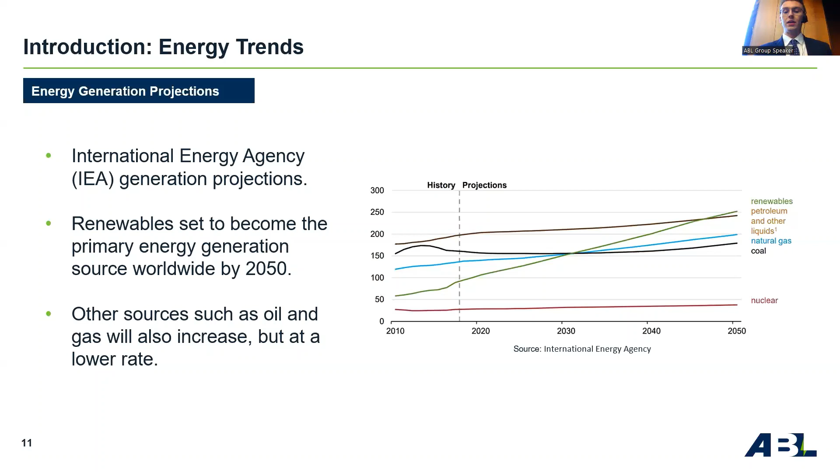Looking to the right-hand side of the dashed line, these IEA-based projections depict that renewables will become the primary energy generation source worldwide by 2050. I should note that the near linear growth rate emphasizes that this is a fairly simplified prediction. Of course, other sources will increase their output to keep up with the rising demand during this period, but at a lower rate. If this projection of renewable energy taking over as the primary generation method is to become reality, what is it that we must keep up with in terms of our energy consumption?

A harsh dichotomy to these renewable energy projections is presented in the graph seen on the left. From the Energy Information Administration, we can see that global energy demand is on an exponential rise, with 2020 levels in Asia set to double by 2050. Of course, this is not news to any of us in the room today, but for renewable energy sources to take over in the race to keep up with our global demand, the following questions are raised.

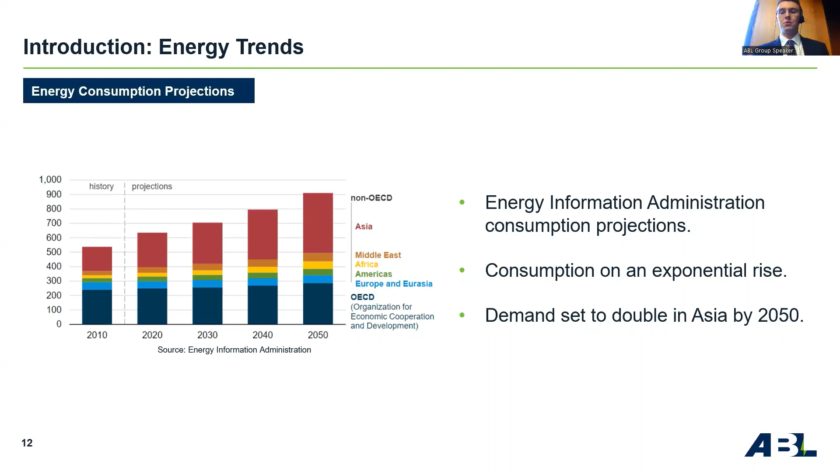What can be done between now and the prophetic 2050 marker that so many governments and international bodies have set as our next environmental milestone? What advancements and improvements in technology must be made in this time? And finally, is it even going to be possible?

So how can we best illustrate the contest we're currently facing between our energy production versus our demand? Well, I thought there's no better way to describe potentially the biggest problem we're facing right now than through a cartoon. So the cartoon on the right depicts a race, which itself has infinite laps, in which we have our energy demand forever in first place, with its foot firmly on the accelerator.

The lagging racers, renewables, oil and gas, nuclear, to name a few, are constantly fighting to keep up with the demand, overtaking, undertaking, and sometimes cutting corners to do so. How then do we create the image we see here, with renewables overtaking its competitors and tailing our demand? The components of renewable energy generation must be modified and improved, much like our renewable cars components.

The graph on the left from the Energy Information Administration shows the average annual growth rates of renewables supply from 1990 to 2020. We can see many components: solar PV, or the engine of our car, wind, the chassis, and biogases, the drag reduction system, are currently the best performing parts of the renewables car.

But what about the tires, gearbox, steering wheel, airbox, and so on? Small 1% improvements to each of these components may not make a notable difference in isolation, but together they compound into improving the overall performance and endurance of our car. So each must be developed to its full potential. Clearly, there's room for improvement to allow the top speed to be pushed further and further, particularly in hydro, geothermal, and thermal energy storage. So, how can we act against the clock to improve these?

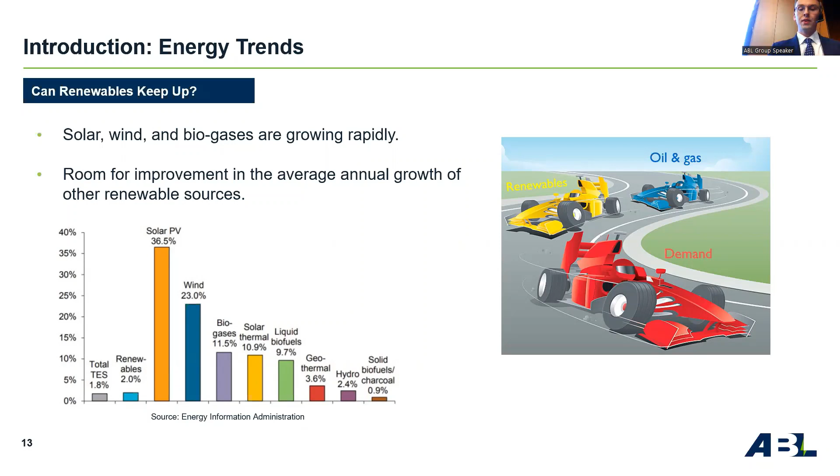Before getting into current renewable technologies and the importance of their advancement, I just want to give you an historical overview of some of the legislation that is driving this transition at a political level and what it means for the EU, the UK, and ourselves at ABL as well.

So a bit of a historical background. In 1992, countries joined an international treaty, the United Nations Framework Convention on Climate Change, as a framework for international cooperation to combat climate change by limiting average global temperature increases and prevent dangerous human interference with the climate system. The Conference of Parties, or COP, was established as the supreme decision-making body of the UNFCCC.

By 1995, countries launched negotiations to strengthen the global response to climate change and, two years later, adopted the Kyoto Protocol, which legally bound developed countries to emission reduction targets.

Today, the UNFCCC has near universal membership, and the Kyoto Protocol has since been replaced by the more commonly known Paris Agreement. The Paris Agreement was adopted by 196 parties back in 2015 and requires economic and social transformation.

It also works on a 5-year cycle of increasingly ambitious nationally determined contributions, or NDCs, which are each country's climate action plans. On the screen are some examples of NDCs set by the UK and the EU.

In terms of how these goals have translated for us at ABL, we are currently working towards a target of 50% of group revenues to be generated from renewables by 2025.

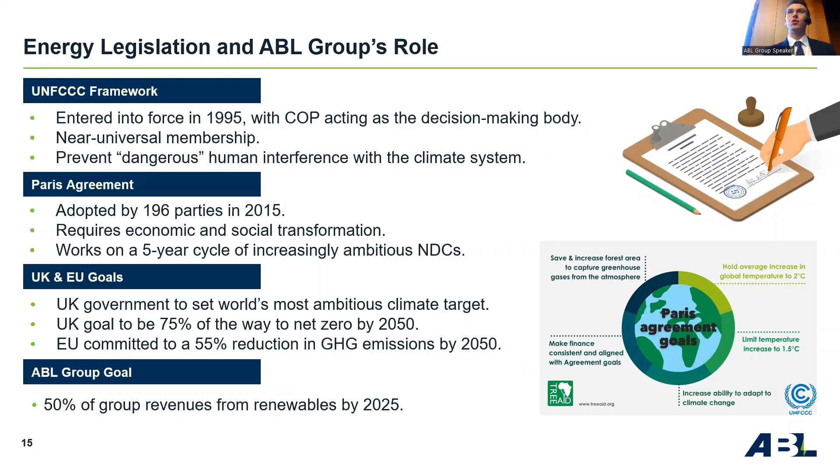Bringing us into the present, most recently at COP27, which lasted almost 2 weeks and ended on November 18th, produced 5 main outcomes. The first is that the need for funding for loss and damage was finally admitted to the agenda for the first time.

This was after developed countries had long sought to avoid direct talks on financing loss and damage. This resulted in about 340 million euros of new pledges.

The second is that the influence of oil and gas interests at the climate talks is growing, with a 26% increase in registration from lobbyists from the oil and gas industries at COP27 compared to COP26.

Thirdly, concerns that current net zero targets are not rigorous enough, and in the words of the UN chief, have loopholes wide enough to drive a diesel truck through, have meant that net zero targets have been made stricter.

This is to avoid greenwashing, the act of making unsubstantiated claims about the positive environmental impact of a product.

Before now, food and farming has been a topic which has remained absent in UN talks, even though global food chains from production to consumption contribute to around a third of greenhouse gas emissions.

This year, flooding in Pakistan saw rice harvests plummet by about 31%, while drought caused yield losses in the US, Europe, China, and India. This prompted the Food and Agriculture for Sustainable Transformation, or FAST initiative, to be established.

And finally, the technology mechanism was established in 2010 by the COP to facilitate technology development and transfer to developing countries. This year, a work program was launched for this in order to accelerate the deployment of transformative climate technologies.

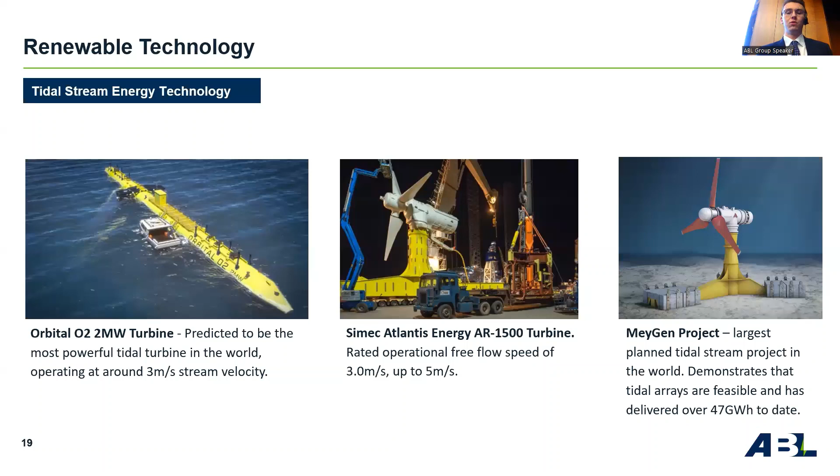There are more than a few factors to consider in the bid to sustainably increase current renewable energy generation, to modify our renewable car as much as possible. These include progressing renewable energy policy mandates, increasing grid stability, capacity, and architecture, ensuring consistent increases in installed capacity to drive down costs, and, for the purpose of this presentation, most importantly, technological advancements through research and development.

In this part of my presentation, I'm going to exemplify the importance of research and development in unlocking more of the Earth's potential renewable energy, and will use my own university dissertation as a form of a case study.

There is massive potential for communities to power their lives using the ocean, which could generate well above 130,000 terawatt hours of electricity per year, according to the International Renewable Energy Agency. The UK government estimates that wave and tidal stream energy combined has the potential to deliver around 20% of the UK's current electricity needs, which is around 30 to 50 gigawatts.

Unlike solar and wind, tidal is a predictable and reliable source of renewable energy, as the motion is constantly driven by gravity. However, due to the limitations I just mentioned, tidal technology currently lies far behind its renewable competitors in terms of development due to its highly site-specific nature. Lower velocity sea regions, that is between 1 to 2 meters per second, are far more prevalent throughout the globe. Therefore, the design of tidal stream turbines to accommodate these sites could improve the overall global feasibility of tidal technology.

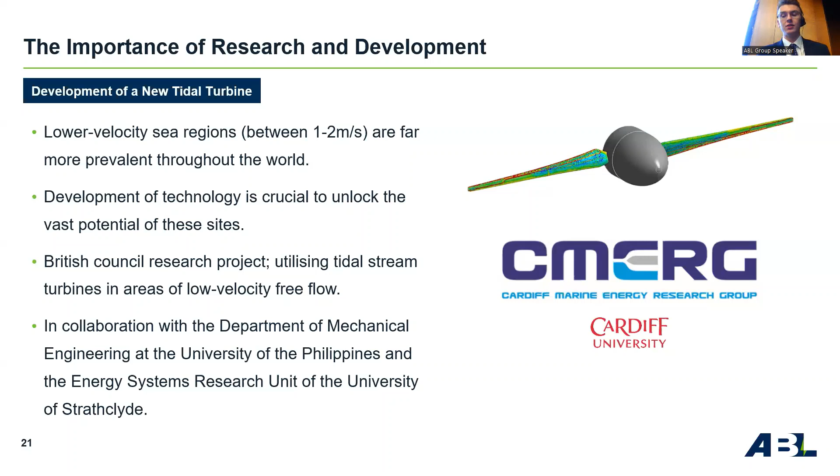As part of Cardiff Marine Energy Research Group, the work I carried out during my penultimate year at university was part of a British Council research project. This project looked at utilising small-scale tidal stream turbines in areas of low-velocity free flow.

The work itself presented a structural analysis using a form of finite element analysis software on a new twin-blade 4-meter diameter tidal stream turbine to operate in low-energy bodies of water in the Philippines. This design will likely be implemented within a cluster of floating turbines.

To begin, results from a previous fluid dynamics software analysis were taken to accurately simulate the forces that the turbine would experience in operation. With these forces known, I then analysed if the turbine could operate successfully or if it would fail miserably under the tide's load.

For the purpose of this study, the parameter of main focus was the safety factor. Defined as the ratio between the ultimate material stress and the maximum stress actually reached in operation, the safety factor gives the likelihood of failure of the turbine over a given design life.

This means when the safety factor is less than 1, failure is certain to occur before the design life is met. According to the engineering toolbox, rotating turbine components should have an overall safety factor within the range of 2 to 3, meaning for safe operation within a given design life, the maximum recorded stress within the turbine should be 2 to 3 times smaller than the maximum allowable material stress.

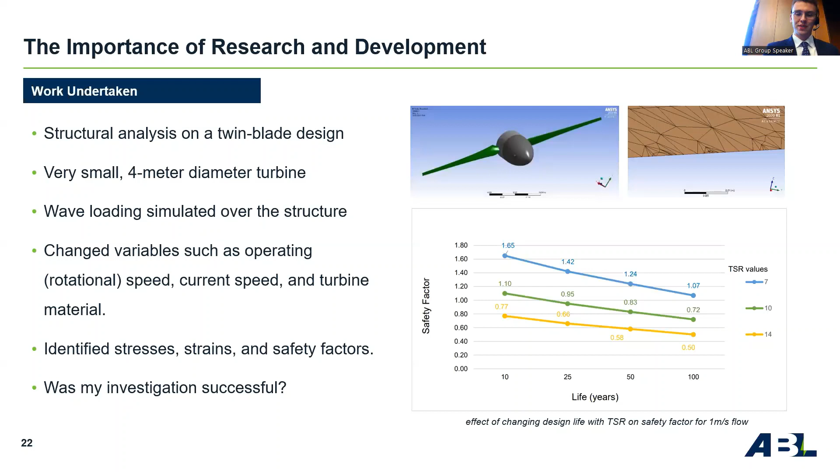As with most endeavors to advance our current technology, this one was not as fruitful as I'd hoped. I concluded that safe operation was not possible for the design with the chosen materials, as my best case safety factor was still some way off the lower limit for safe design. However, promise was shown towards safe operation over a 25-year design life, with further research and development needed.

Potential was shown in the movement towards small-scale tidal turbine technology and its integration into the abundant low-energy marine areas around the world. As for future recommendations, I touched upon the importance of further research and development in this study, given the potential benefits of its success.

My future work suggestions included further breakdown of the blade structure to increase result accuracy, further investigation into the behaviors of different materials and metals being used for the design, with the possibility of incorporating internal support structures, development of a full environmental impact assessment, or EIA, prior to the front-end engineering design, or FEED package, and finally using both CFD and FEA software in a two-way fluid structure interaction to accurately hone results.

I hope this element of my presentation wasn't too technical today, and I also hope it's given you some insight into how close the next technological step can be for renewable energy systems. I believe the importance of funding and training to support research and development in accelerating the renewables race is just as important as the speed with which we implement new installations.

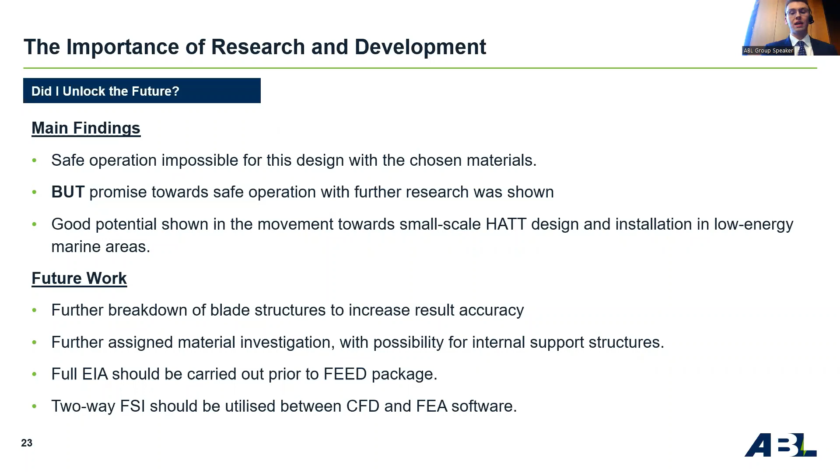On the topic of tidal research, I'm just going to touch upon some examples of what's currently going on within ABL Group.

ABL Group's marine energy engineering consultants at INNOSEA in France are already working on implementing small-scale tidal turbines with developers Nova Innovation. Since 2016, Nova Innovation have been installing a turbine array in Shetland.

This array now consists of 6 turbines, each of 9 meters diameter, and is currently powering around 600 homes. It's the world's first fully functioning tidal array and boasts the most turbines.

The developers worked with Tesla also to add energy storage to their tidal technology, creating the world's first grid-connected tidal power station with the ability to deliver baseload power and energy on demand to meet consumer needs.

Nova also have an array being constructed in the Bay of Fundy in Canada, which is home to the largest tidal range in the world. The technology here, much like that...

in my research project, is focused on small, extremely reliable turbines to bring down the cost and frequency of maintenance. Nova claims that its current array can operate for 18 months without intervention.

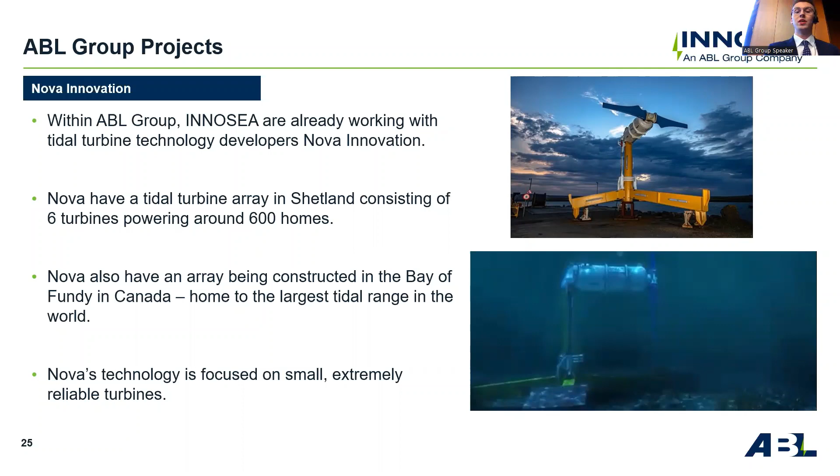And if you weren't already convinced on tidal energy, Nova Innovation apparently has plans to produce Scotch whisky distilled by tidal power in the Sound of Islay off the coast of Scotland.

INNOSEA have also contributed towards a project on the EU's Research and Innovation funding programme, Horizon 2020, titled Effective Lifetime Extension in the Marine Environment for Tidal Energy, or ELEMENT programme.

The goal of this project, led by Nova Innovation, is to reduce tidal energy costs and increase installation lifetime by optimizing the control system of a tidal turbine.

that will slash the lifetime cost of energy by 17%, making the EU tidal energy sector commercially viable.

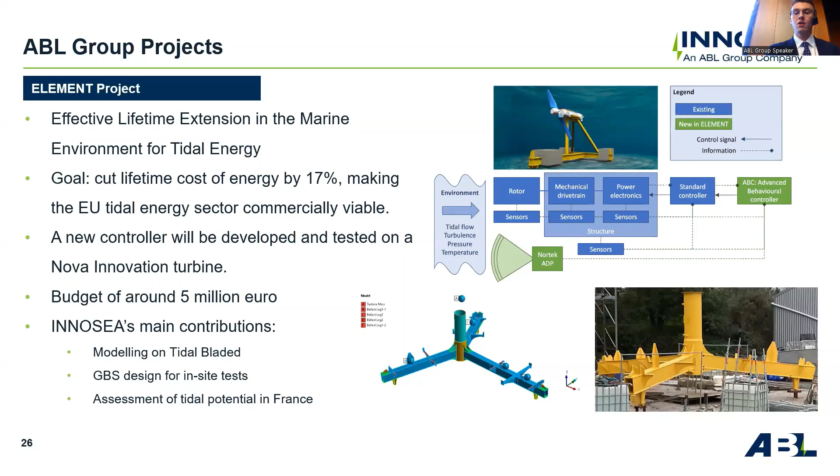The overall budget of this project is in the region of €5 million, and INNOSEA's main contributions included computational modeling of the turbine, work on the gravity-based structure, pictured in the bottom right, from initial design to construction and testing, and finally, assessment of tidal potential in France, which involved evaluation of socio-economic, regulatory, ecological, and human impacts.

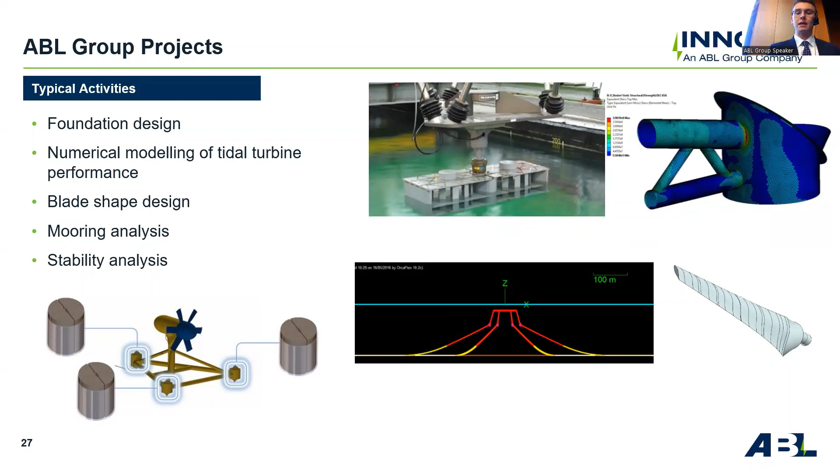Other work conducted at INNOSEA includes turbine foundation design, numerical modeling of tidal turbine performance, blade shape design, mooring analysis, and installation stability analysis. If you'd like any further information on these projects, please email myself and I can refer you to our experts in INNOSEA.

Knowing where I'd be delivering this presentation today, I knew that in trying to draw a complete picture of my chosen topic, I could not go without talking about the risk associated with some of the engineering I've touched upon. Of course, as with any engineering operation, there are risks involved in renewable energy installations. I'm going to finish now by presenting some risks and hazards in offshore energy in particular.

Understanding the risks and hazards associated with the engineering and construction of new technologies in the renewable realm are still in their infancy, particularly where natural catastrophes are concerned. With the introduction of new tools and technologies comes new challenges in construction.

Offshore renewable projects involving tidal, wind, and solar farms pose significant challenges to insurers responsible for underwriting these risks. Larger, more complex projects mean bigger potential losses, while the threat of natural disaster looms large.

As for tidal, risks arise from vessel collision, which applies to most offshore installations, blade damage or corrosion as they are fully submerged in the ocean, and unexpected impacts from marine wildlife.

It should be noted that risks can also arise from the birth of new technologies. As with all new designs, when they are first implemented in the field, reduced operational capacity can often bring claims resulting from loss of income for operators. This can be caused by reduction in operational capacity pending completion of remedial works, or for permanent loss of income if the defect cannot be rectified.

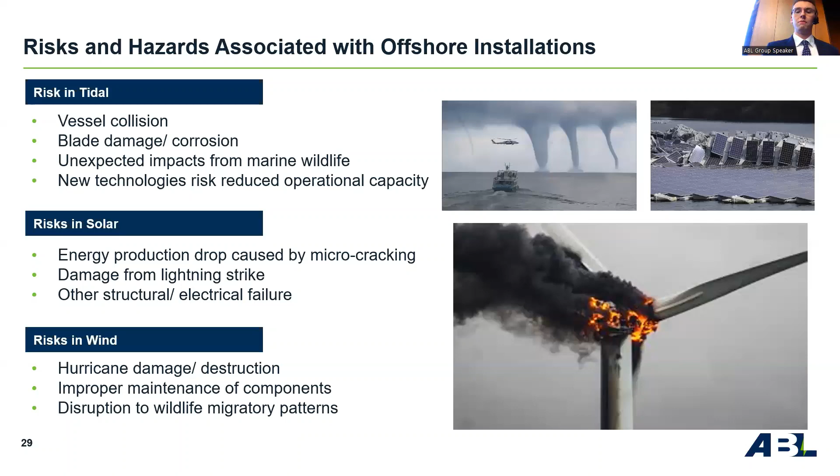Of course, the immediate marine environment and inhabitants must be considered in construction also, which is often carried out in an EIA prior to FEED work.

Finally, general hazards when working on offshore installations include falls from height, mechanical hazards, blade failure, ice throws, ship collision or men overboard, electrical hazards, and, as mentioned before, fire or explosion of turbines or vessels.

Though the desire to quickly accelerate renewable energy production is clear, the obligation to first evaluate associated risks should not be forgotten.

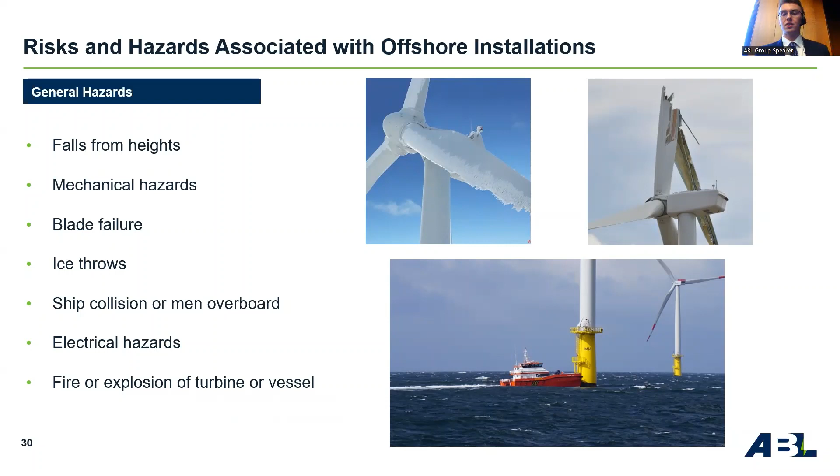So, to finish, let's recap on today's learning objectives. Firstly, you will be able to identify current energy trends, comparing projections of energy production to energy demand. Secondly, you will develop an understanding of clean energy legislation and what it means for the industry. Thirdly, you will be able to explain the importance of research and development in unlocking potential offshore renewable energy sources. Finally, you will be able to summarize the risks and hazards associated with offshore renewable energy installations.

Hopefully these outcomes have been met for those of you in the room today and online, and I hope you found this presentation insightful. Are there any questions? You're also welcome to email them across to Ellie later on.

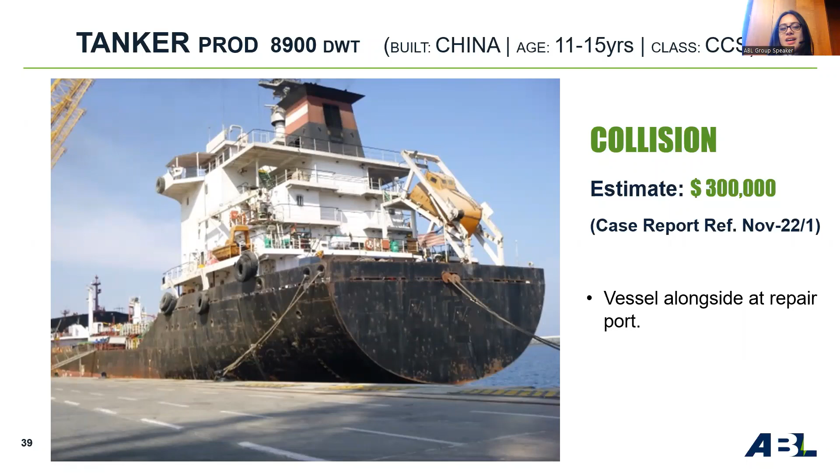First up, we have this 15-year-old products tanker that was involved in a glancing blow-type collision while departing a Middle Eastern port at about 3 o'clock in the morning. The other vessel was inbound on the fairway, and both pilots had communicated and agreed to pass each other in a standard port-to-port configuration. For some reason, however, the other vessel suddenly deviated to port, and despite efforts to get out of the way, our vessel here got hit on her port side aft. Nothing dramatic in terms of damage, fortunately.

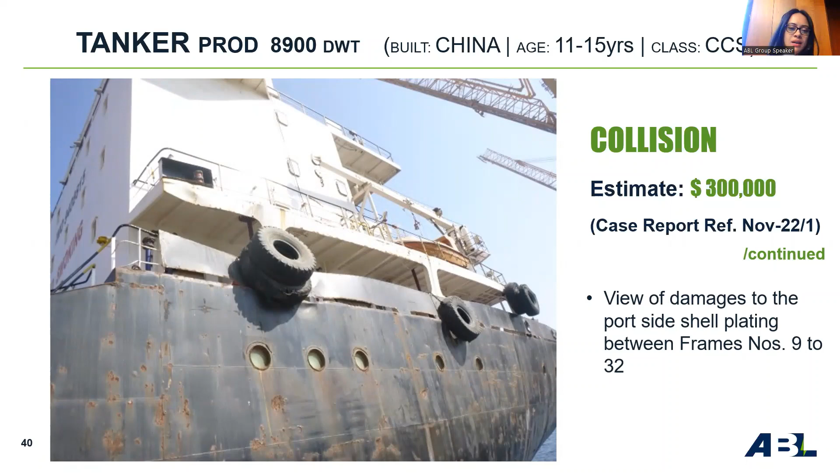We haven't got the full story yet from the other vessel, but if you were looking for a root cause in incidents like this, you would be looking at possible things like navigation equipment failure, steering system failure, loss of power, or navigational error.

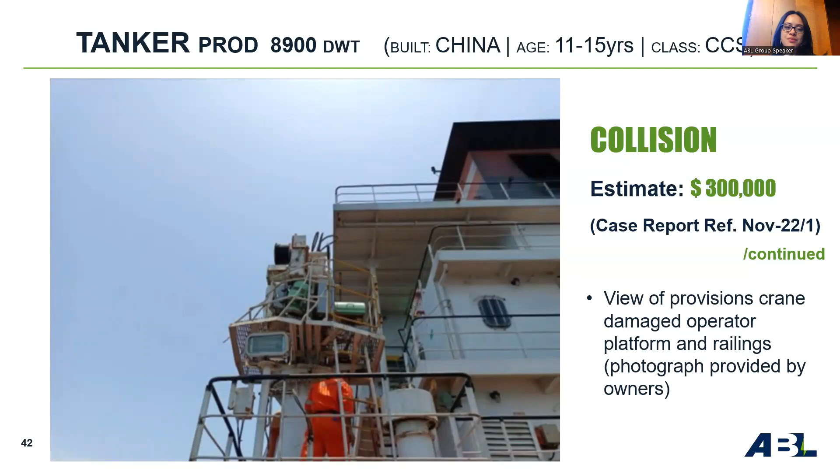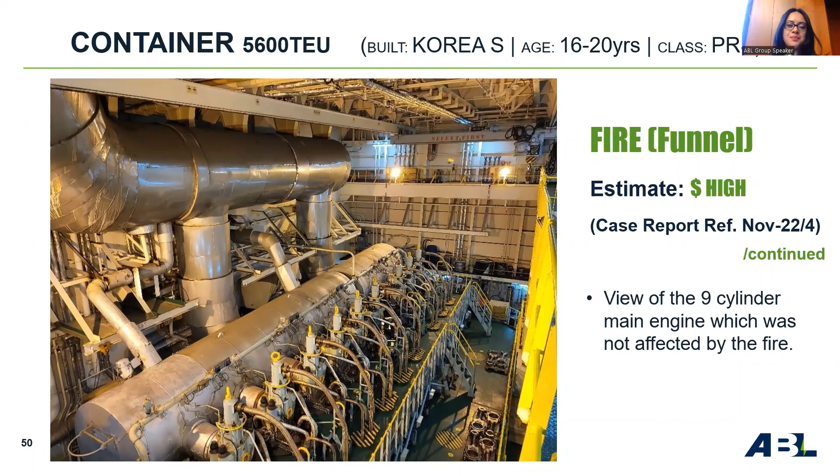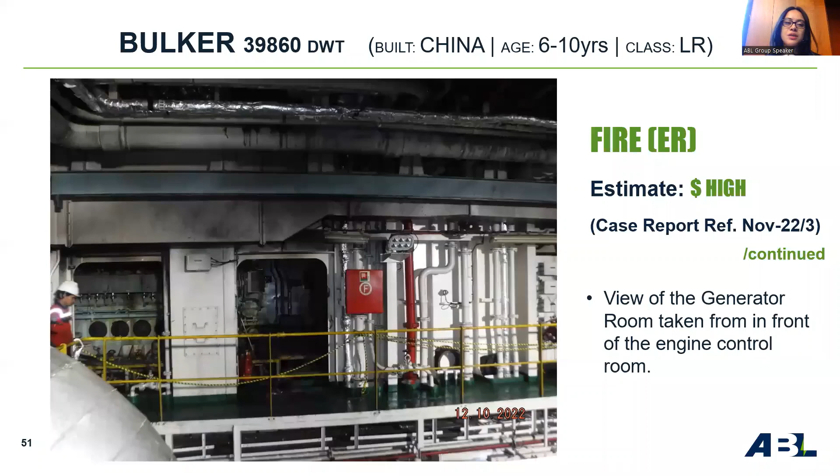The bulk of the direct fire damage was in the generator room, seen here, from a position just outside of the control room. Going in there, we find all 3 generators badly affected. Examining the scene, the seat of the fire appears to be in way of the number 2 generator engine.

The exact cause is under investigation still, but it could well yet be another, sadly familiar, example of failure of a high-pressure fuel line spraying fuel onto hot engine parts, such as the turbocharger.

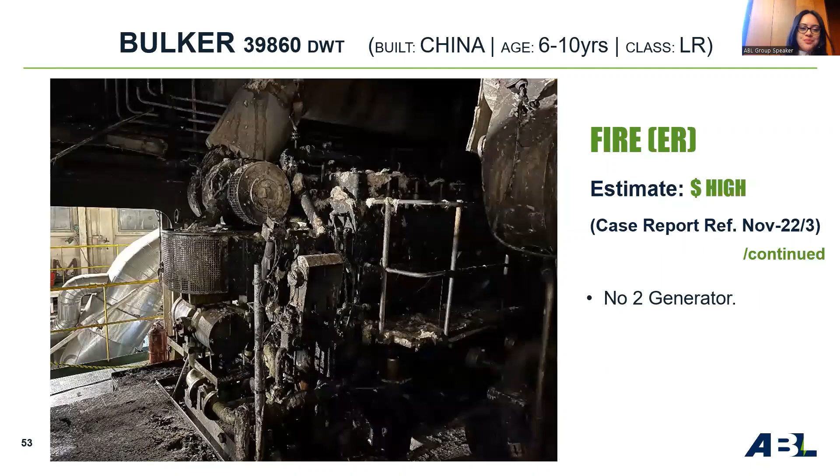Here's the deck head above the number 2 generator. Steel renewals will be required as the deck above has deformed with the heat. And as always, replacing wiring will be a significant portion of the total repair cost.

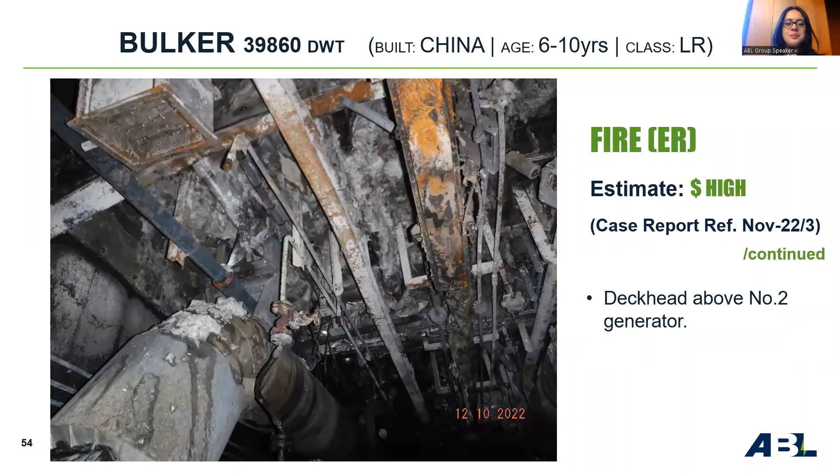And now, for the fun bit, the relatively new type of story. This 17-year-old container ship suffered the order of $2.5 million worth of damage as a result of a fire that broke out in her scrubber funnel at 2 a.m. in the morning, 2 hours after she left a European port.

Scrubbers, or exhaust gas cleaning systems as you know, are necessary retrofits to older vessels to remove particulate matter and harmful components, such as sulfur oxides and nitrogen oxides, from the engine exhaust gases. We saw lots of fire incidents during the installation of these scrubber systems, and here's a case of fire occurring during operation.

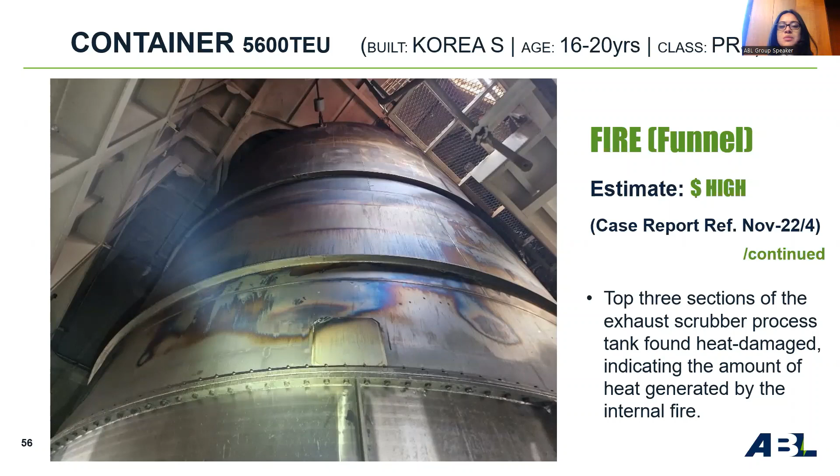In this case, the fire was contained within the exhaust gas scrubber process tank, as seen here, where the upper 3 sections external shell indicate the amount of heat that was generated by the internal fire. The radiated heat from the tank, though, did also affect wiring, light fittings, and some structure and paintwork in the vicinity.

It would appear that the fire originated in the packed bed filters, which are now broken and deformed. Mist eliminator filters further up the stack have also been damaged by the heat.

The cause is still under investigation, and we'll be keeping an eye out for these sorts of casualties and any near misses. Indeed, if you're lucky, Paul Hill may mention problems with these relatively new systems in his New Year review in January's briefing.

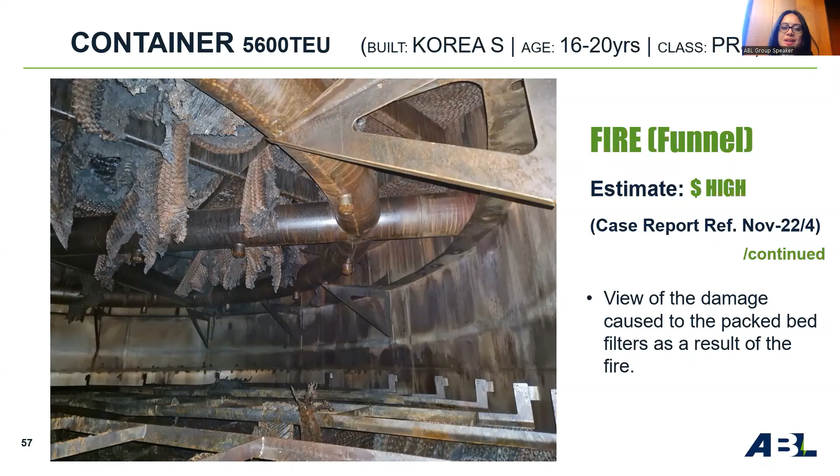Now, a few groundings. This first vessel might look like a deck cargo barge, and that is her basic construction, but she is actually self-propelled and described as a deck cargo ship.

While on a voyage in the Far East transporting a full cargo of coal, this 12-year-old vessel received warnings of an approaching typhoon and diverted to seek shelter at what they thought would be a suitable anchorage. Alas, as strong winds and currents increased with the passing storm, the vessel dragged her anchors even with the engines running, and she ended up aground when they had to shut down the starboard engine due to an overheating turbocharger.

Tugs and a lightering barge were sent to assist. A breach in the engine room was temporarily sealed, and after lightering about 2,000 tons of the cargo, the vessel refloated and was towed to her destination port 3 days away for full discharge, and then onwards for repair, where we see her now.

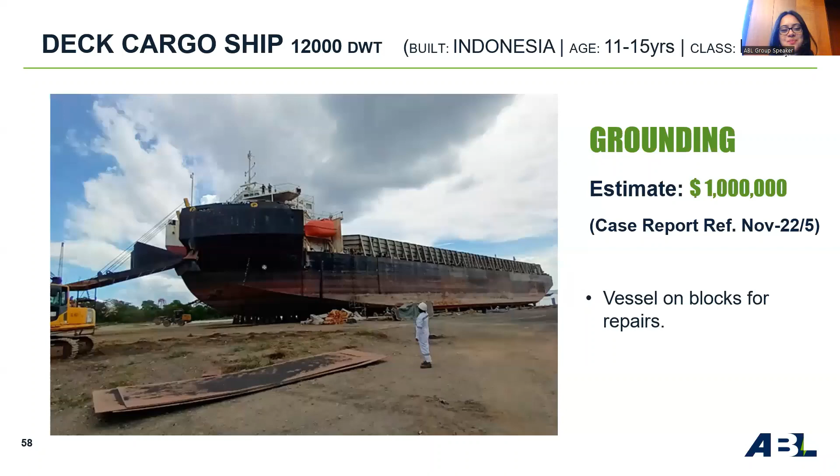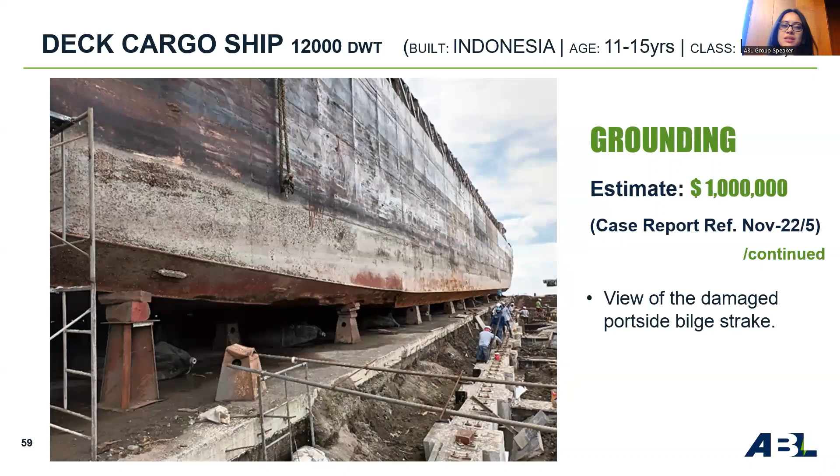Notice that she has been slipped by means of roller airbags and is now supported on blocks. This is a general view of the damaged port side, which suffered most of the grounding damage. Here, we can see heavy indentations at the number 2 port side water ballast tank. Similar damage has occurred all along the port side.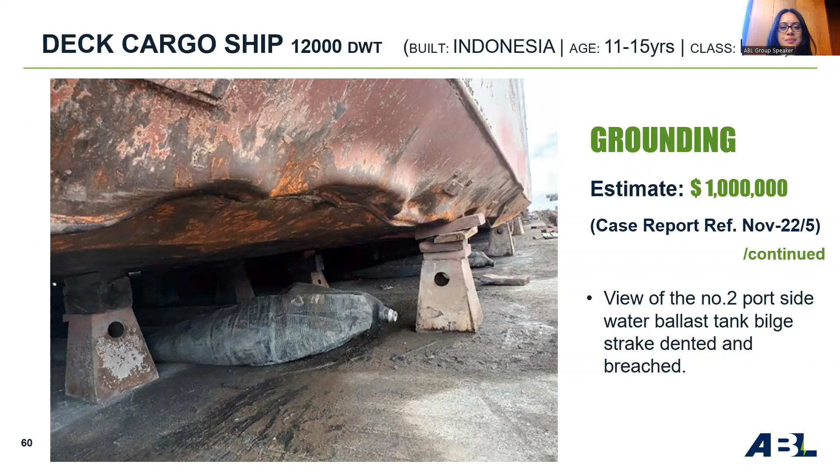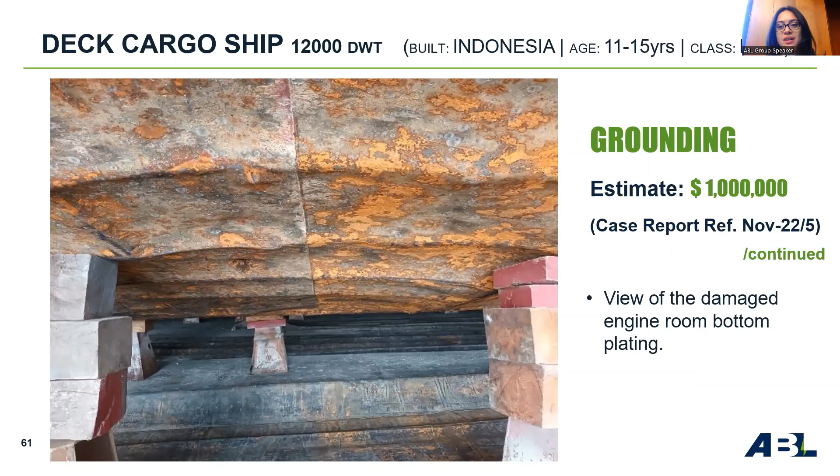And here, a better view of the heavy setting up of the engine room bottom plating. Probably about 80 tons of steel renewals required in total. Oh yes, and damage to the port propeller as well for good measure.

So at about $1 million being estimated for repairs, this is quite an expensive damage to a small vessel like this, and probably about $250,000 for salvage services as well. Going back to the circumstances of the incident, in cases like this, even with more conventional ships, the question mark about the adequacy of powering of modern vessels compared to the good old days often appears.

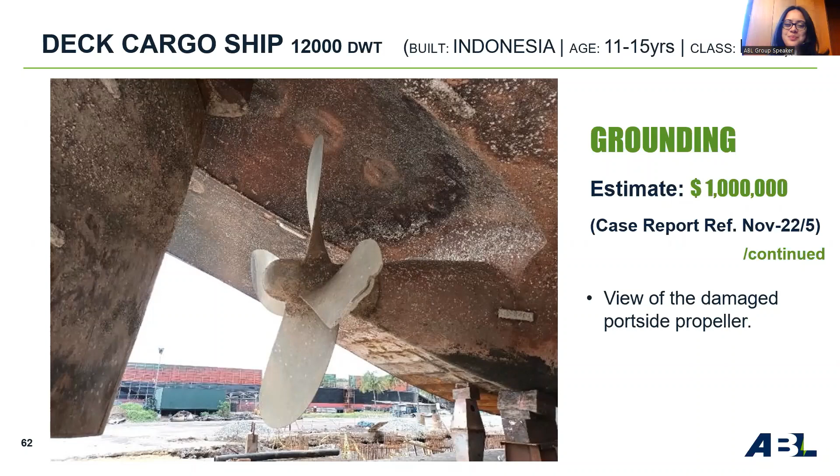The second grounding case this month exceeded the $1 million mark. This 11-year-old Handy-Max-sized bulk carrier went aground in the Sea of Marmara while awaiting inspections to enter the grain corridor in the Black Sea to pick up a cargo of maize from Ukraine. She wasn't allowed to anchor because of the traffic in the area and had to stay adrift with the main engine on standby for 8 days.

The grounding probably occurred simply due to navigational errors of judgment, yet this cannot have been helped by such long periods of waiting. Hull damages only, thankfully, no damage to the propeller or rudder. Probably about 30 days in dry dock needed though.

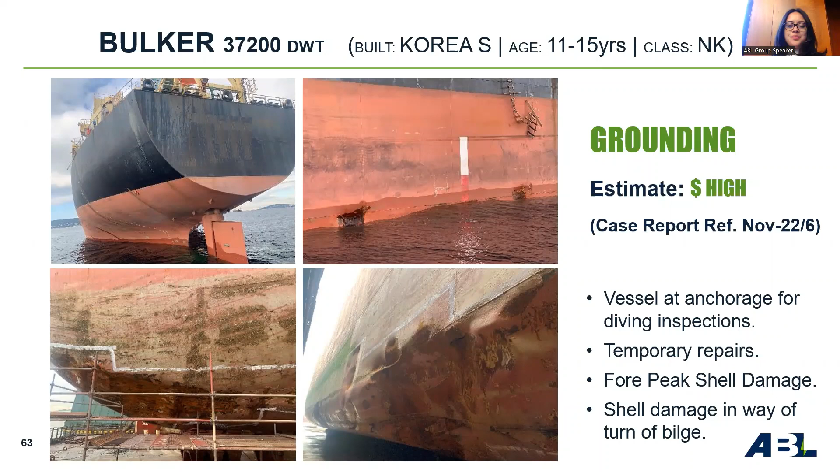This third grounding case has a nice wrinkle to it. This 18-year-old handy-sized tanker was in transit off the coast in the Americas when the crew felt ominous vibrations while making a turn. There was no shoal or shallow water at the location on the current electronic chart they were using though. The vessel started to list to starboard with a breach in the number 3 starboard water ballast tank.

However, they were able to balance this by ballasting the number 7 ballast tank on the port side and then proceed to a dry dock where the bottom damage was revealed.

The interesting part of this is that another of the owner's vessels had run aground way back in 2012 at a location nearby. And when they dug out the old chart from that time, they discovered the shallow area that they had run over this time marked on that old chart, but not on this new one. This is a sobering reminder that the latest version does not necessarily mean the most accurate version in all respects.

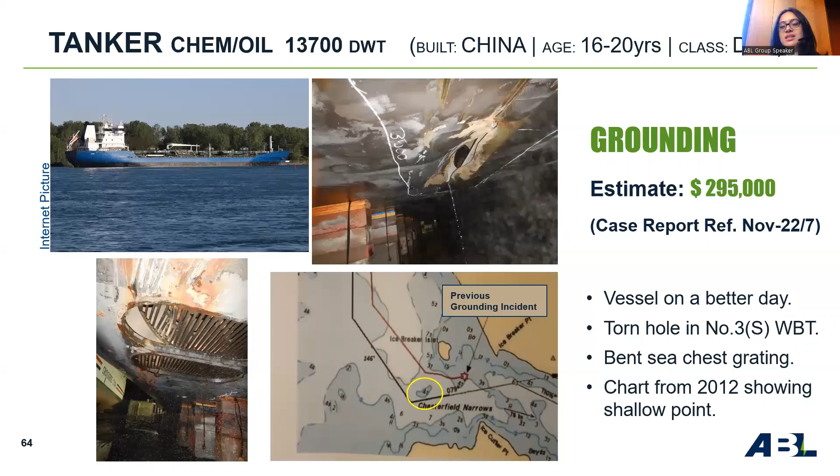And this is just going to be a quick skip through 3 of the main engine casualties to finish. The first is a familiar tale, the second a bit unusual, and the third is an eye-watering, considering the cost involved compared to the relatively small size of the vessel.

First is this 19-year-old Suezmax tanker that suffered a series of slowdowns due to lube oil system pressure failure in international waters in the Middle East. They just shut down the big low-speed main engine to investigate and discovered extensive scuffing and scoring to at least 1 crank pin at the crankshaft and at least 3 crosshead pins.

Towage to a repair port was necessary, and this added to the cost to grind the crankshaft, with total costs likely to be of the order of $3 million or so, although there are some disputes about the cost of the towage element. Oil starvation causing metal-to-metal contact on the bearing is the usual immediate cause of such damage to bearings and pins. In this case, investigations are still underway to establish the root cause of the loss of lube oil pressure, for which our surveyor is awaiting all the maintenance records and lube oil analysis reports.

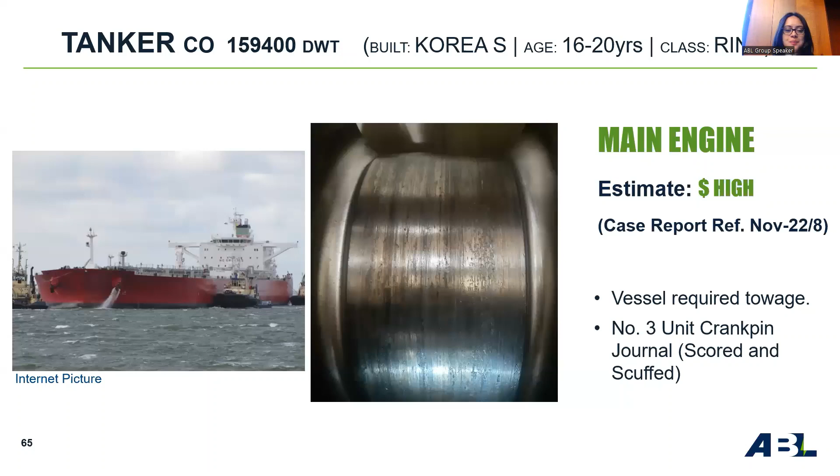This 12-year-old handy-sized bulker, on a routine ballast passage in European waters, suffered main engine shutdown and a blackout while transiting a traffic separation scheme in Beaufort 9 conditions. She had just sustained several large wave strikes. It was her port engine that had shut down due to a crankcase oil mist alarm.

The crew attempted to restart the engine a few times after cleaning the oil mist detector, but without checking the crankcase, which, with hindsight, may be a bit embarrassing for them. But they were in a traffic separation scheme, and it's perhaps understandable that they didn't want to drift into the wrong lane. When they did check the crankcase, they found metallic debris from the bearings and reported the problem to the managers.

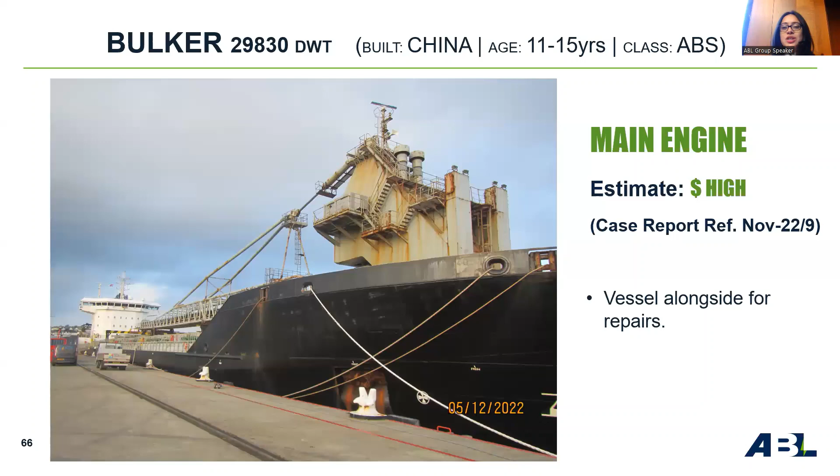In the end, they had to limp to a repair port on just one engine. The damage was found to be centered at just the number 5 unit of the engine. Grinding of the number 5 crank pin to its limits has now been attempted, but alas, cracks and excessive hardness are still present, and the crankshaft has to be replaced.

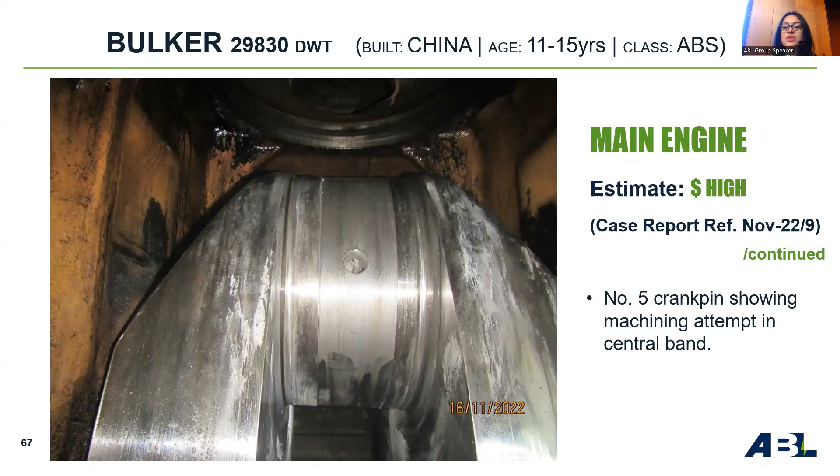Although heavy weather damage to engines is very uncommon, and while investigations into the cause of this damage are still underway, it may be that the precipitating oil mist alarm resulted from the wave strikes that the vessel experienced.

Just to make a link with the final case coming up, we have to note that to remove and replace the crankshaft, they had to cut a hole into the engine room from the aft cargo hold. All other bits fitted through the engine room hatch. Keep in mind that the cost to cut this access route was of the order of $75,000, about 7% of the total repair cost of just over $1.1 million.

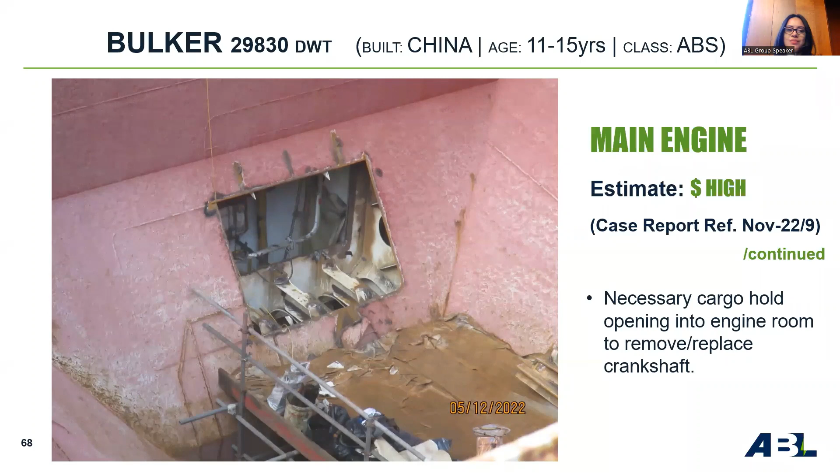And yes, you probably guessed it, the eye-watering cost case involves a lovely motor yacht. Not this one, though.

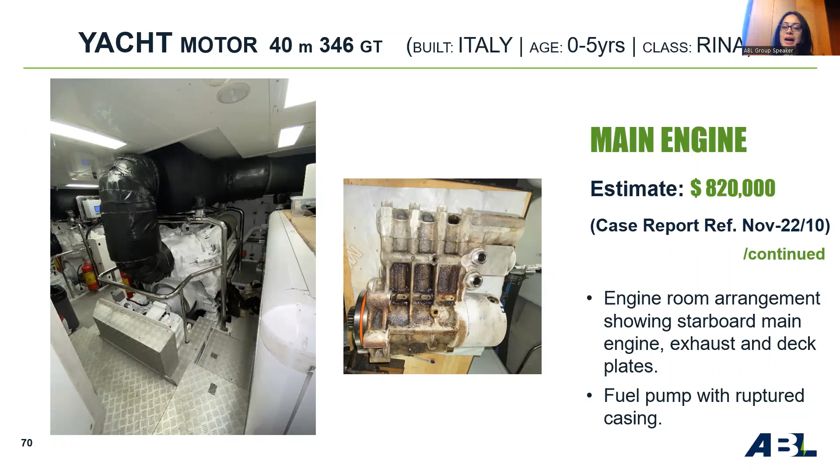While transiting between ports in the Americas, the vessel in question suffered structural failure of the starboard main engine high-pressure fuel oil pump, thereby contaminating the engine's lubrication system with metallic debris. To ensure satisfactory cleaning, the engine will have to be removed from the vessel, as there is insufficient space around the engine to carry out the work on site. Unfortunately, in this case, that will mean having to cut a hole in the composite side structure of the hull and also remove the starboard generator and other equipment that get in the way.

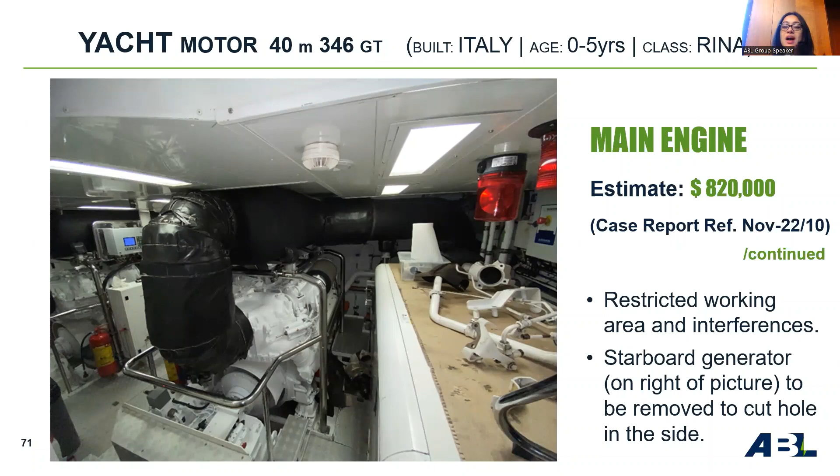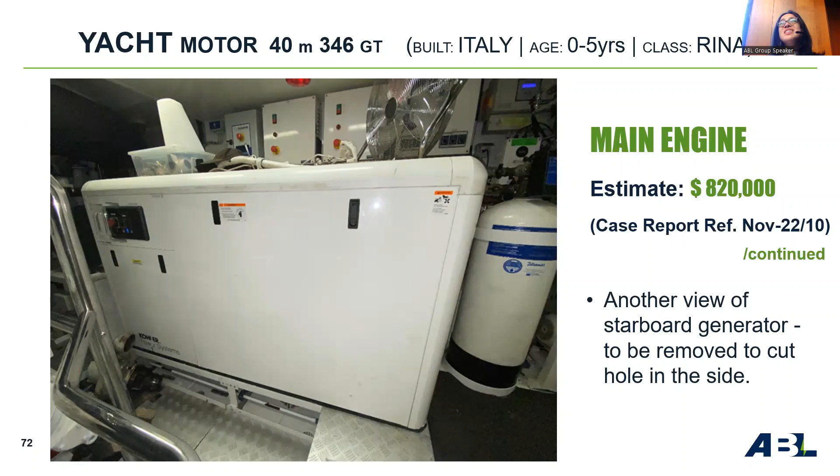Here's a view of the removal route as yet to be created. Now, I told you to hold on to that figure of $75,000 to create an access route for the crankshaft of the bulk carrier we just saw, which was 7% of the total cost. Well, for this yacht, they are quoting $200,000 for removal and reinstatement, which is nearly 25% of the total cost.